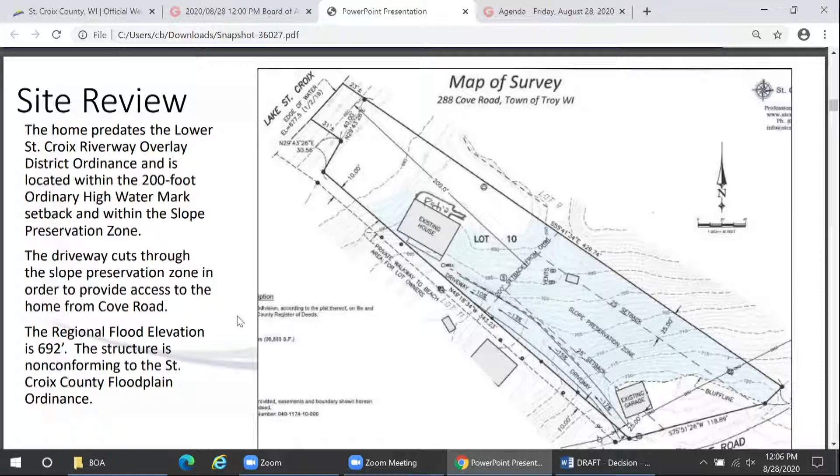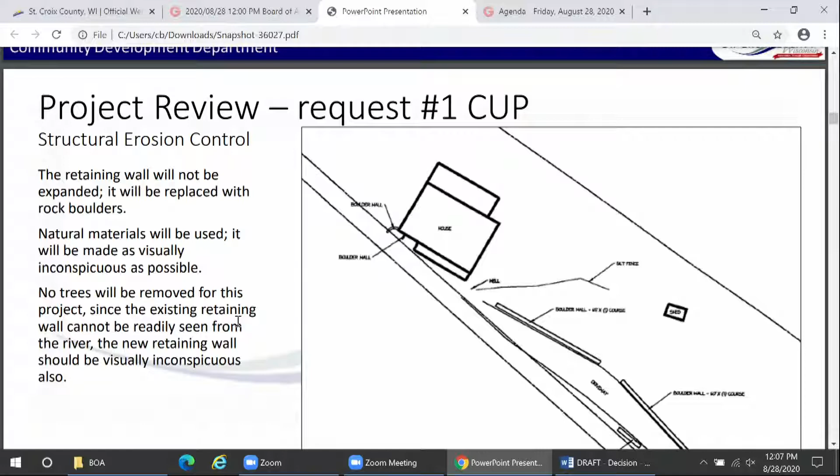Just to jump ahead, the retaining wall will not be expanded, and it will be replaced with rock boulders. There are essentially three segments to the work: a smaller segment on the southwest side, and two segments with a break on the northeast side of the driveway. The intent is to use natural materials, basically rock boulders, and to place those from the driveway so that there isn't more disturbance alongside the driveway on either side. No trees will be removed for this part of the project, since the existing retaining wall cannot be readily seen from the river. The new retaining wall should be visually inconspicuous also.

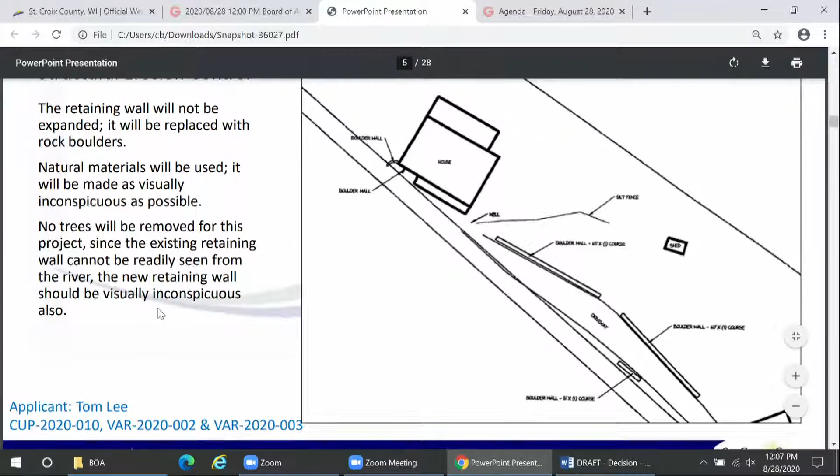Now, just to move on here a little bit, regarding stormwater and erosion control, construction plans and erosion sediment control plans have been reviewed. Required additional erosion control measures will be installed per staff recommendation.

The applicant and their contractor have provided details on what they intend to do. There will also be additional information required before the work proceeds. The existing grade of the wall will not change, nor will there be excavation into the driveway, and drain tile will not be used behind the boulder wall.

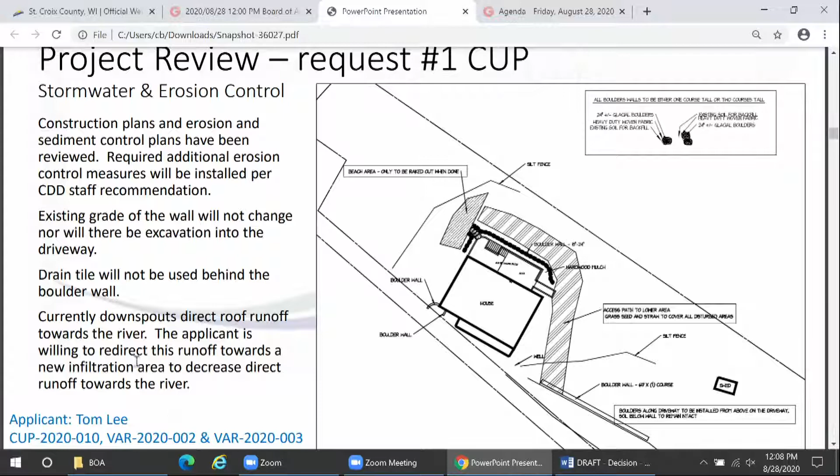Currently, downspouts direct roof runoff toward the river. One thing that's beneficial here is the applicant is willing to redirect this runoff towards a new infiltration area to decrease direct runoff towards the river.

Just so you understand what you're seeing with this plan, this access path area is an area that will be used and restored to provide equipment access to the river side of the property, or back side, depending on how you're looking at it.

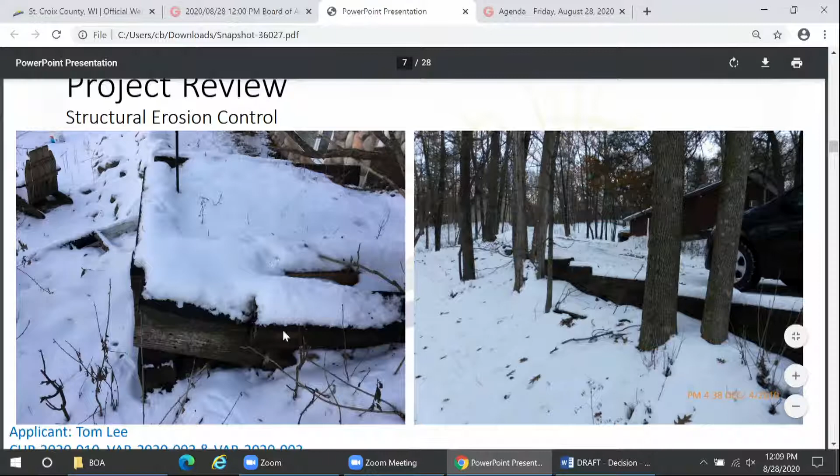Just a couple photos real quick: the retaining wall along the driveway, and this is a little corner near the side of the house that is in need of repair and will be addressed as well.

To continue the overview, the second part of the request involves the lower deck, replacement of the lower deck. Essentially, the applicant is wanting to replace the deck with a patio.

This was not discussed initially, and the contractor found that the deck was rotten and needed to be replaced, so proceeded to tear out the existing lower decking. The property owner is requesting to replace this decking with a paver patio.

The area identified in red is consistent with what was there for the lower deck area. We noted that it was going to reduce by about 15 square feet, but in our most recent visit with the contractor, we concluded it was essentially going to be the same square footage as the previous lower deck.

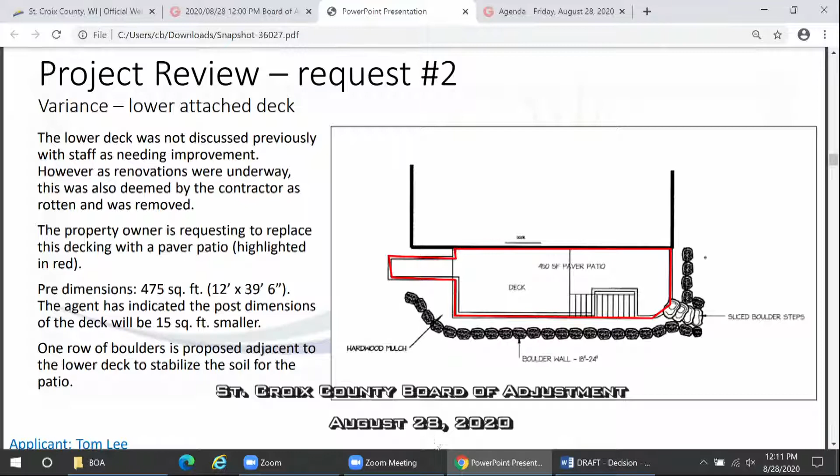You can also see there's essentially a boulder wall to secure and hold up the soil for the patio construction.

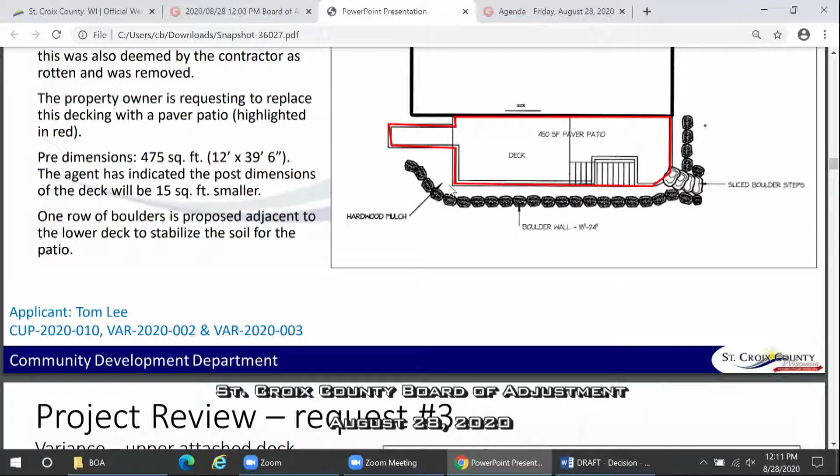Excuse me, but this is a good point to ask the question. Retaining walls are allowed only if they solve an erosion problem. If I remember right, and I may not, you'll correct me if I've got it wrong. Is there an erosion problem?

I don't believe the intent of this, and the applicant can speak to this as well, is to address an erosion problem. I think the intent is, going from a deck that had a continuous board to support the decking materials, these boulders are essentially supporting the fill, the base that's going to underlay the patio.

It's not a high wall. It's not really structurally retaining slope, but you can certainly pose that question to the applicant. They may be able to explain a little more clearly why they're proposing to use the boulders there.

I would go on with the upper deck. The intent, again, originally was to work within the ordinary maintenance and repair provision, which did not involve expansion, structural alteration, or reconstruction. Now, as the renovations were underway, the stairway was deemed rotten and was removed.

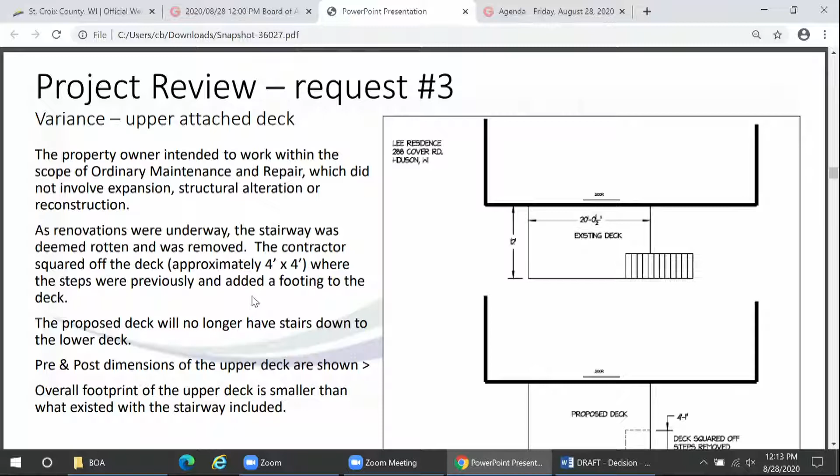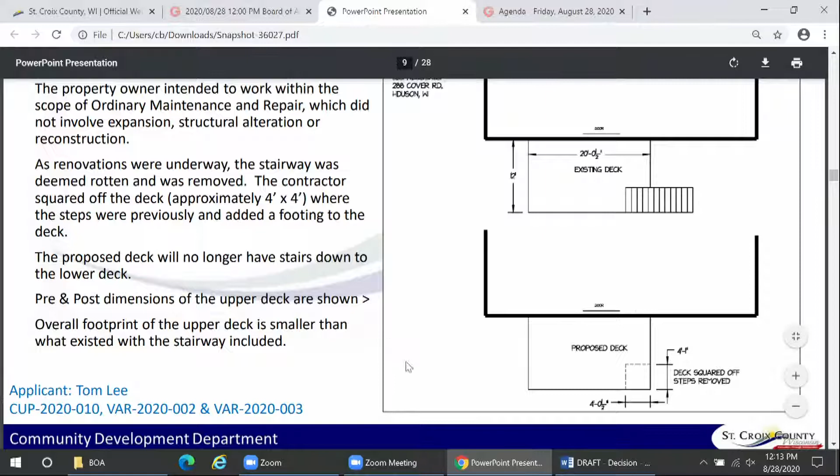The contractor squared off the deck with a 4-by-4 foot area, shown in this graphic in this slide. It would be right in this area, essentially part of where the stairs came up to the deck, and the proposed deck will no longer have stairs to the lower deck.

Pre and post dimensions of the upper deck are shown, and the overall footprint of the deck is, depending on how you look at it, actually smaller because you don't have the stairs extending down, although the lower patio would be underneath that area where the stairs come down.

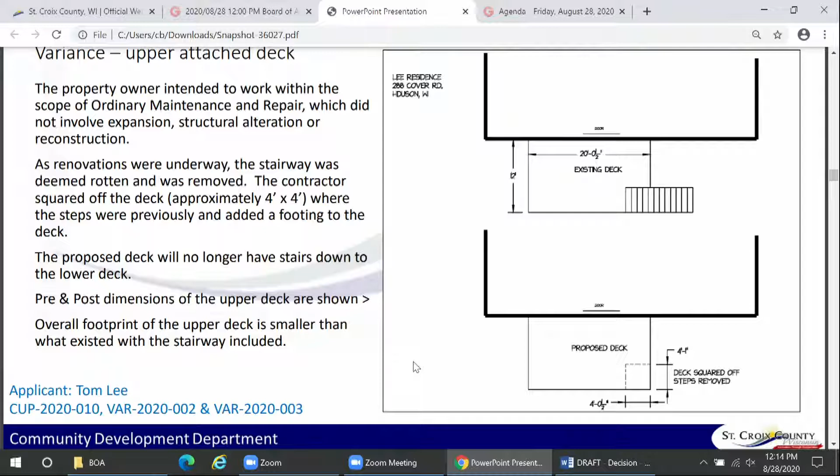So essentially it's the same size, but there is a difference in the visual impact, because from the water, if you're looking at the property, those stairs come down and you're looking directly at where the stairs would be coming down, albeit from a distance.

With the stairs removed, your view is actually through the deck to the landscape behind, so it's probably less conspicuous with the stairs not being part of the proposed improvements.

Just a couple visuals on this. This was the decking that was there below, and the upper decking as well. The stairs are gone at this point, but you can see where that notch was. A couple views.

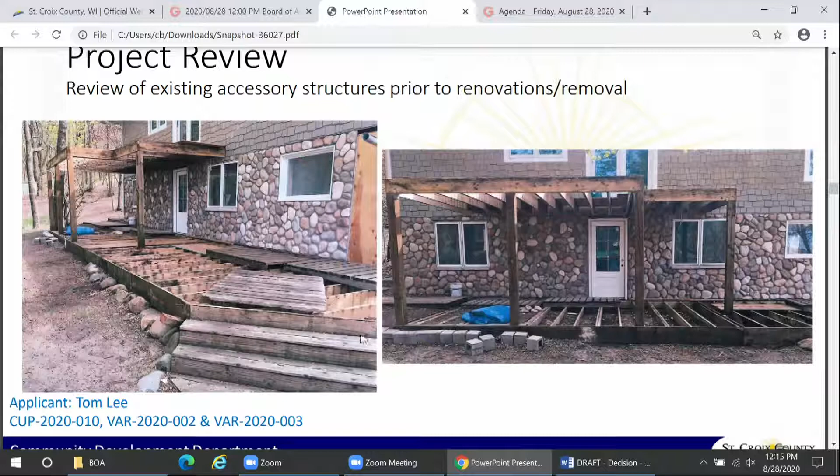I think where these concrete blocks are is essentially what we're talking about for the boulders. You can see along this area here.

These are a couple shots of the work that's been done to date on the reconstruction of the upper deck. The railing isn't fully in, but it would essentially be like what was there with the deck before the reconstruction.

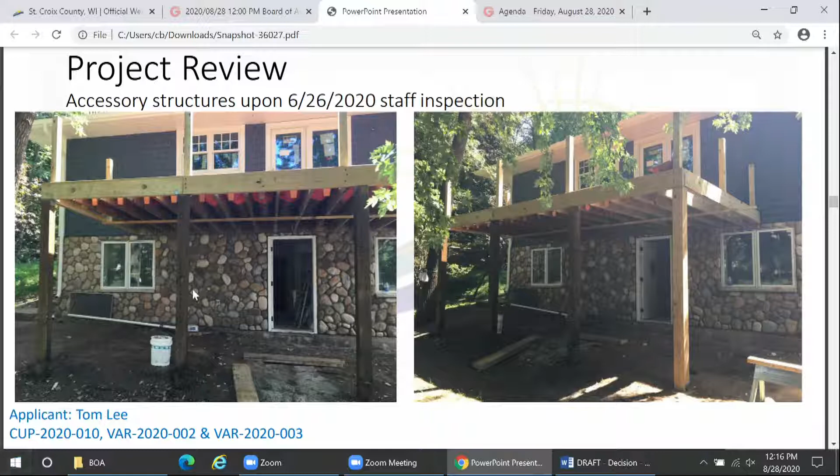The difference being the 4-by-4-foot additional area is at this corner. There's another footing below, and the stairs that carry down here are no longer going to be part of the new plan. The patio would be underneath and provide access from the lower floor.

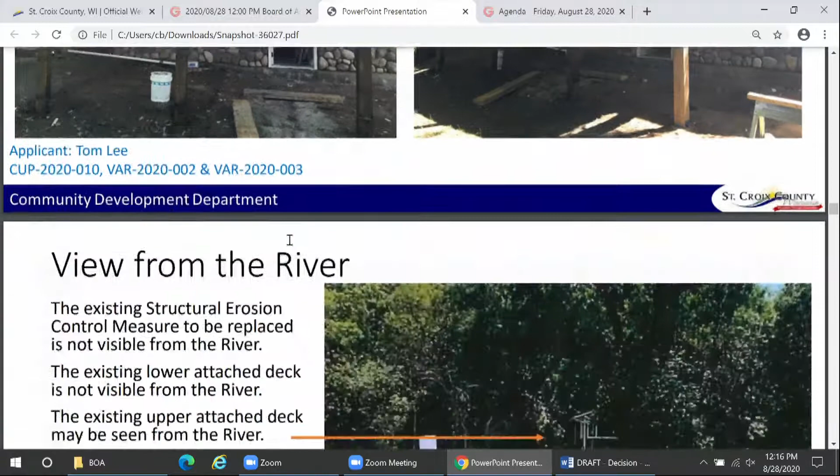This is a shot from the river, looking at the house. There's a massive cottonwood tree here, but the upper deck would be right in this area, and it's visible, but not especially conspicuous - probably a little less so with the stairs removed. The lower deck, and if the patio is allowed to move forward, is really not conspicuous from the view from the river.

I would note that there are 2 ash trees that the applicant proposes to remove. One is along the northeast side of the house, kind of hanging over the house, and is considered a hazard. The other would be on the river side of the house, behind the big cottonwood tree that blocks the view from here, and it is dead and definitely needs to be removed because it is a hazard.

We have not received comments from the Wisconsin DNR or the town of Troy.

Now, this is structured again with 3 actions. Some of the material is redundant, so I'm not going to go through in detail all of the findings and recommendations for each of the recommended actions. I would note that, as usual, you have the options to approve, deny, or table and postpone based on a need for more information or unresolved questions.

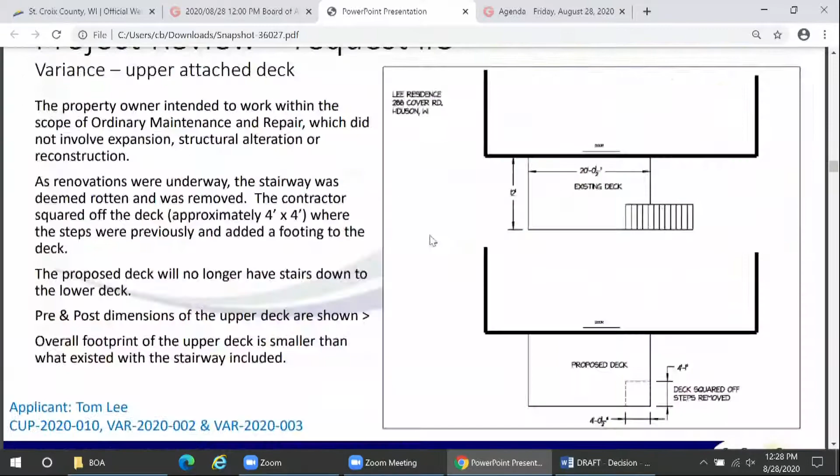Let me bounce back to page 10, or no, a different page would be page 8, maybe, would be one on which you could show us. Back about, yeah, there. That one might work. Yes.

Sarah, I'm going to ask for a little help here. Maybe you can jog my memory on the infiltration area.

Just to the left of your cursor right there where that small boulder wall is, there was a downspout right there. It would be the southwest corner of the house, if you will. Down just a little bit further, right there. So right there is where there was a downspout that was directing, and there was some tubing shedding water away from the roof.

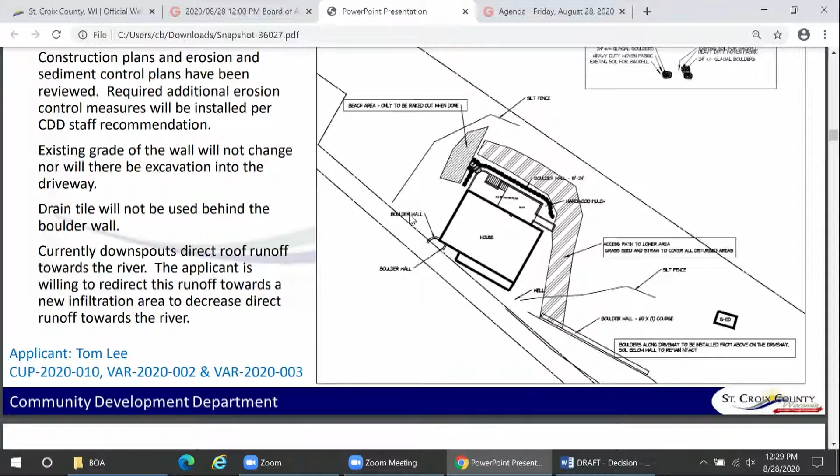It kind of daylighted out with one of those plastic tubes from the end of the downspout. When we were on site just this last time with the contractor, we had just talked about a little retention area right there to allow it to infiltrate rather than shooting it out further, directing it towards the river. So whenever the river is not flooding that area, water from the roof would be able to infiltrate there.

The idea is to do something to diffuse it and allow it to infiltrate rather than just run more directly to the river and potentially carry some of the silt and sediment with it. I think that's really the gist of this conditional use and 2 variances, because the work is beyond the ordinary maintenance on the upper and lower decks.

It doesn't look like much controversy here, but board members, do you have any questions you want to ask? I know these people just bought this house, but do you know, has this house been flooded?

Okay, if you've already signed in, then step up to our microphone. Sure, so if you go back to 1952, this house would have flooded 4 times.

Are you Mr. Lee? I am. Yeah, sure, I'm Tom Lee, the owner of the property. Great, welcome. Thank you.

But it hasn't been flooded since then. Well, 4 times. I believe the last time was in the late 90s, early 2000s period. So I'm aware that flooding is possible. I'm not naive to that point.